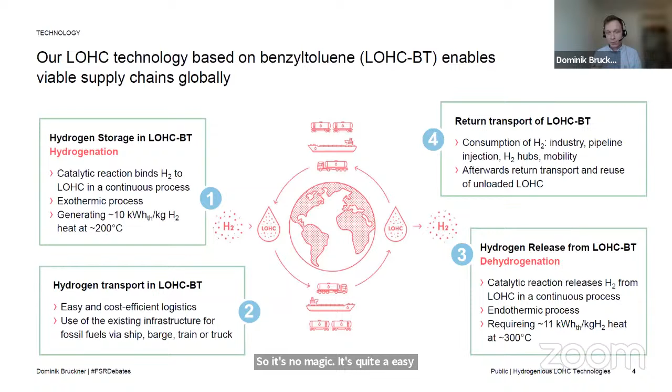And what is important here to notice are the following things. So why do I think it's a really nice technology? It's depicted here in the slide. So let's start on the left. What is really important to us is that our solution, LOHC, is quite safe. So you can handle it, differently to molecular hydrogen, really easily.

It's hardly flammable. So at 130 degrees, it starts to burn, but before that, it's hard to make it flammable. It's also non-explosive. And the hazard potential is comparable to diesel. Most people are aware of how to handle diesel. Therefore, we think it's safe, also far more safe compared to ammonia, for example.

Then in the middle here, the next point which I want to make is that you can use the existing infrastructure because it's a liquid fuel and it's comparable to diesel. Therefore, you can use existing vessels, and I will come to that also in more detail later on. So you can use existing infrastructure because LOHC can be handled at ambient temperature and ambient pressure. So it's really easy to transport and store.

And most importantly, if you compare it to liquid hydrogen, for example, you don't have a self-discharge, you don't have a boil-off, so nothing is lost during the transportation, for example, from the MENA region to Europe. So in general, we think that we have a high efficiency with the LOHC technology. The important parameter is that you can store 54 kilograms of hydrogen in 1 cubic meter of LOHC. And the carrier material benzyltoluene is already available.

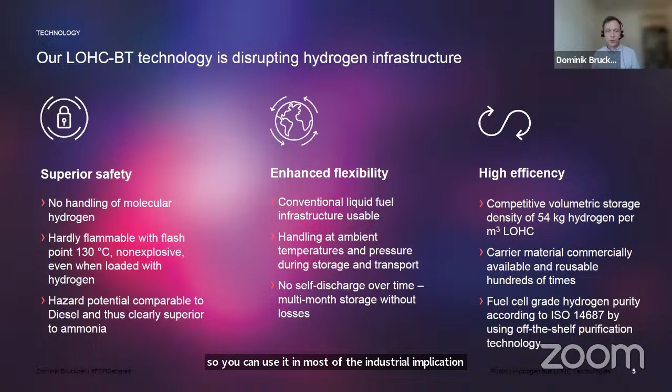And lastly, if you talk about the purity of the hydrogen at the end of the supply chain, then the purity of this supply chain using LOHC is quite high. So you can use it in most of the industrial processes without a second purification step. So this is concerning the LOHC technology as it is.

And is this reality or is it just theory? We at Hydrogenious already think it's reality, or we don't think it, we did it. And here you see an overview of our projects from left to right. It's what we've done so far, what we are doing right now, and what we are going to do in the future. So on the top left, you see our first project.

Here we already provided LOHC to a hydrogen refilling station. And I think this has been done 1.5 years ago. So we proved that the technology is ready, it's safe, it's working. Right now, at the bottom left, this is what we are constructing. So we are scaling up the technology. We are right now building a plant where we aim to transport 1,800 tons per year of hydrogen from Germany to other places, or within Germany. And lastly, in the near future, 2027 and 2030, we plan to transport more and more amounts of hydrogen.

So we plan with an IPCEI project to transport 8,000 tons per year, for example, from Sweden to Germany. And later on, looking at 2030, we are going to really scale up the technology. We're aiming to transport over 1 million tons per year, for example, from the MENA region to the port of Amsterdam, where we already have an ongoing project.

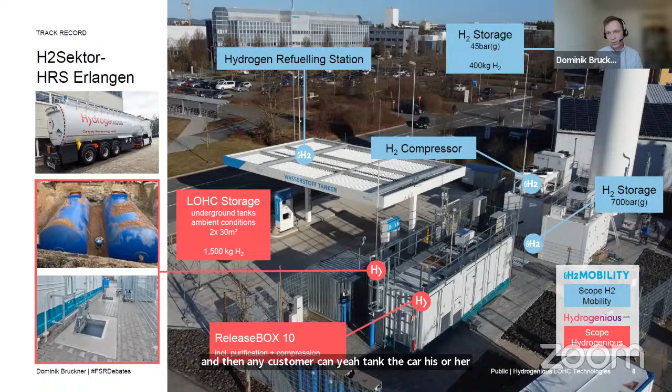And as I said, this is already working. We are producing hydrogen at our office via solar panels, and then we are loading the LOHC, transporting the LOHC to this hydrogen refilling station, and then any customer can tank his or her hydrogen car with the hydrogen we loaded in the LOHC.

And as I said already, this is only on a small scale. Of course, we have to scale it up. Right now we are in the construction of the first industrial scale setup, with a capacity of 5 tons per day of hydrogen. Looking to the future, in 2027 we are going to hopefully finish the project of building a plant with 24 tons per day of hydrogen. And then prospectively in 2030, we'll look at bigger and bigger projects.

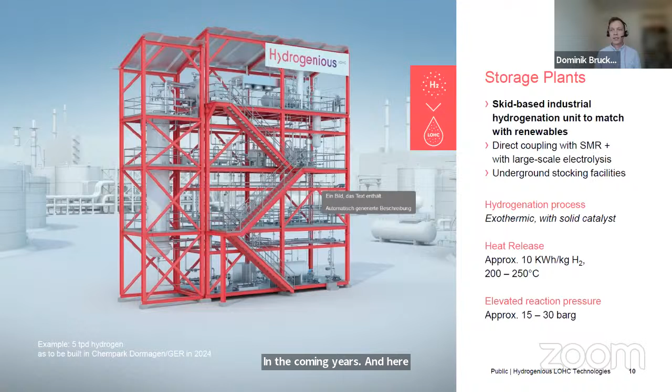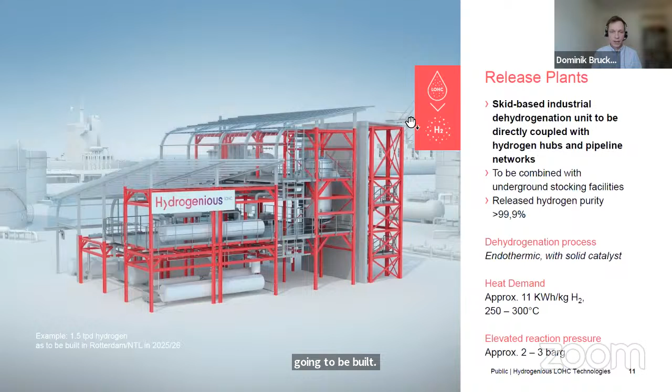Just to give you another glimpse of how the technology looks, this is an example of a storage plant which is going to be built in Germany in the coming years. Here the LOHC is loaded with hydrogen. This is called the storage plant. Similarly, this is the other side where you unload the hydrogen. This is the release plant, which is also going to be built. The construction is already going on.

Okay, of course, everyone here knows that there's not only LOHC, there are also all sorts of other possible carriers. And to be open, we need all those other forms of transporting hydrogen. However, we think that LOHC is a competitive, nice and safe option to transport hydrogen. So here are some studies I wanted to highlight on why we, and also other scientific and industrial partners, believe that LOHC is a nice way to carry hydrogen.

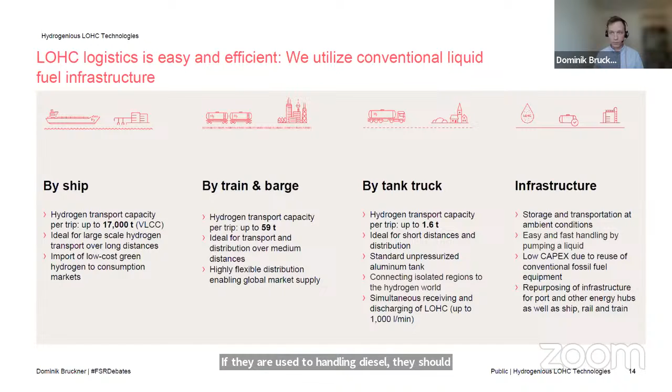So here, one advantage is that we don't need so much investment in order to start the hydrogen transport, and, which I will come to in a second, most of the regulation is in place. And lastly, maybe the most important part is that people are already aware how to handle oil. And therefore, it's quite safe, in our opinion. If they are used to handling diesel, there should be no problems in handling LOHC.

So to make it more concrete, when we talk about existing infrastructure, we can look at ships. And here it's quite simple to look at the existing ships which are available. And we can compare, okay, we have 3 possible carriers. You can transport hydrogen via LOHC, via ammonia, or you can use liquefied hydrogen. So let's start at the bottom. If you want to transport liquefied hydrogen, here you have a big problem because we only have 1 vessel in place. And so it becomes really hard to transport, let's say, 1 million tons of hydrogen because you only have 1 vessel in the world. So this is not the best option.

Okay, then we can look to ammonia. Here there are already existing vessels, but you have to be aware first that those existing vessels are mostly in use for transporting ammonia as a fertilizer. And secondly, there are not nearly a sufficient number of ships to transport the amount of hydrogen which is going to be transported in 2030. So again, it's really hard to imagine that such amounts of hydrogen are going to be transported via LPG vessels. And if you look also at the IEA reports, they state that it's really going to take a lot of time to build such LPG vessels where you can transport ammonia.

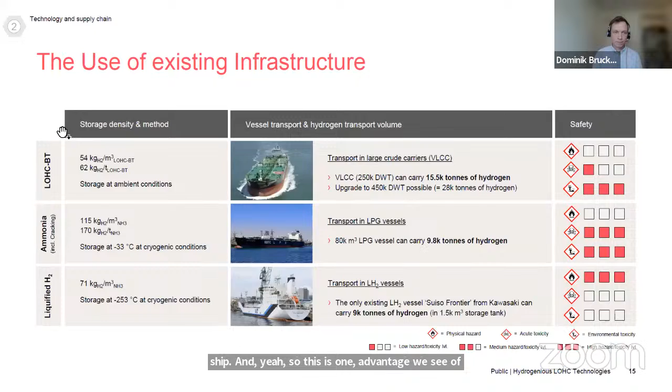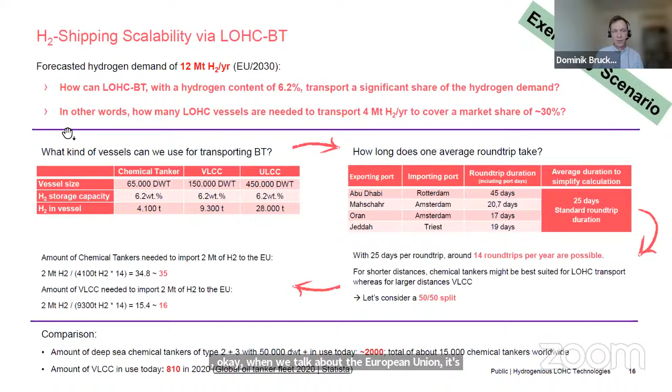Because of time reasons, I will not discuss this. You can make an exemplary scenario where you can show, okay, when we talk about the European Union, it's quite easy to use the existing infrastructure. But for now, I won't mention this. Of course, there are also other issues.

And here I wanted to highlight that there are other challenges which are not only important to us as an LOHC company, but which are also important for other carriers, such as ammonia or liquefied hydrogen. So first off, as the transport sector, we have to look at the regulation concerning RFNBO. And as of now, we see a lot of interpretational playground, so to say. So here, all carriers, as of now, have to make certain that the hydrogen we transport still qualifies as RFNBO.

Similar is the issue if you look at CBAM. So if you want to import hydrogen, for example, to the EU, then we have to make sure that our supply chains are adhering to the principles and the laws implemented by the European Commission.

And lastly, the last points I just wanted to mention are that for us, it's important to look at the regulation concerning inland transport. So here, again, we see an advantage for LOHC because it's easy to handle. And you also need to look at how the purity of hydrogen is defined when it's delivered. So these are also two open questions which all carriers, also LOHC and so on, have to look into.

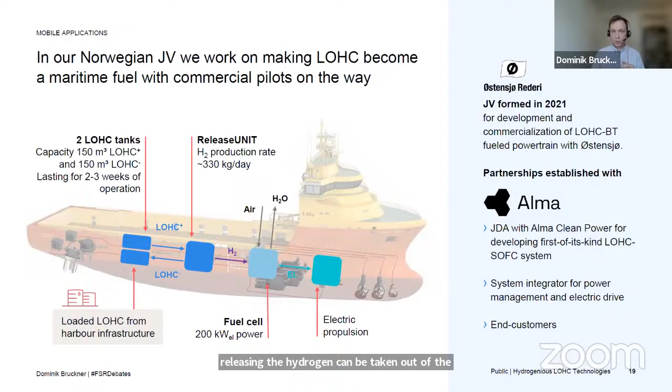The biggest advantage here is that you have a far more efficient process, because the energy for releasing the hydrogen can be taken out of the heat from the fuel cell. So these are my last words here. This is already one ship. This is ready to be repurposed with LOHC technology, and this should be online in 2026, where we aim to also decarbonize the maritime sector. I hope that I gave you a short glimpse of the LOHC technology, and if you have any questions, feel free to ask them now.

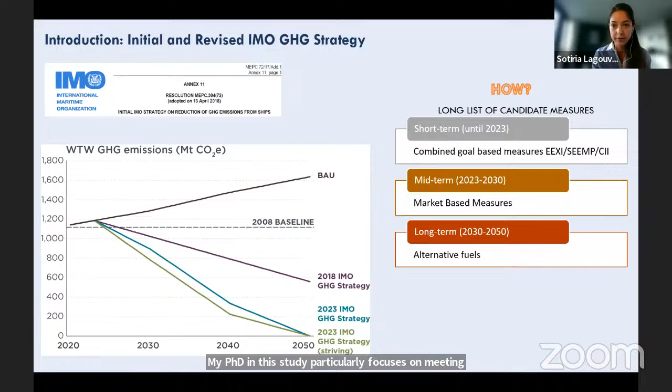And how will this be done? The strategy proposes several candidate measures divided into short, mid, and long-term measures with different implementation periods. My PhD and this study particularly focus on mid and long-term measures, mainly market-based measures and alternative marine fuels. What are market-based measures? They are environmental policies that use market prices and economic variables to enforce the polluter pays principle, and therefore they provide monetary incentives to stakeholders to reduce their carbon footprint. Examples are carbon pricing mechanisms, emissions trading systems, and other offsetting schemes.

And they have several attributes. So they are flexible and cost-effective. They let the stakeholders decide what is the most cost-effective mitigation measure to apply to their business to comply with the rule. And also they can upgrade the level playing field of green ships that already embrace the shift towards low and zero emission systems. Market-based measures can also have both short and long-term implications. A response to those measures can range from logistic-based advances to technical adjustments for reducing greenhouse gases. And they can also render low and zero carbon fuels and their supporting technologies cost competitive.

When it comes to MBMs, what is also very important is that they gather a lot of revenues, and revenues from MBMs can fund low and zero carbon investment projects for accelerating shipping's decarbonization, and also they can correct market failures, because there is a significant concern that market-based measures will have detrimental effects, particularly to lower income economies, small island developing states and least developed countries that are highly dependent on maritime trade.

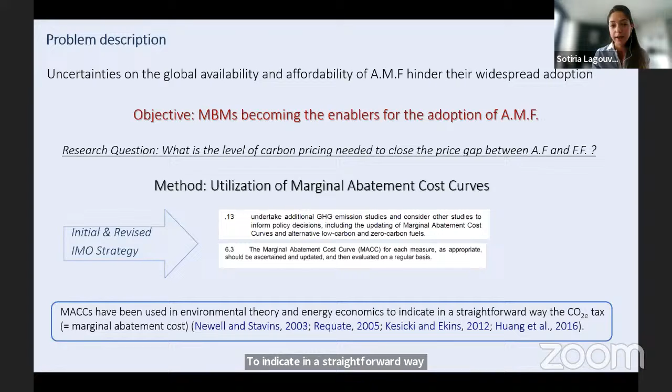We utilize the method of marginal abatement cost curves, which has been widely mentioned also in the initial and revised IMO strategy as a method to evaluate and validate different carbon mitigation technologies. And in general, MACCs have been widely used in environmental theory and energy economics to indicate in a straightforward way the level of the CO2 equivalent tax, which equals the marginal abatement cost.

A little bit on the methodology: MAC basically is the ratio of the net cost to implement any measure to the amount of CO2 it can avert. And if A is the alternative fuel that we want to focus on, then ΔN cost to A is the net cost differential to implement A in comparison with conventional fuel. And then ΔCO2 equivalent is the tons of CO2 that this fuel can avert on a well-to-wake basis of emissions. The inputs of our study: first of all, we had to identify which alternative marine fuels we would like to focus on. What is the capital cost?

Here the capital cost associates with the cost that needs to be burdened by the ship owner to implement the fuel on board the ship, and it includes the cost of internal combustion engine, the specialized fuel tanks to support these fuels, as well as the alternative fuel supply system cost.

Fuel prices: primarily we focused on production costs for these fuels. Opportunity costs: the opportunity cost calculations associate with the revenues lost due to these fuels having lower energy density in comparison to conventional fuels, and therefore the cargo space that needs to be sacrificed on board to accommodate for additional alternative fuel storage capacity.

And finally, the well-to-wake emissions factors, which account for the well-to-tank and tank-to-wake emissions on a CO2 equivalent basis, which means upstream and downstream emissions from the production and combustion of the fuels on board. The fuels that we focused on include conventional fuels and their bio and E derivatives, as well as blue and green fuels.

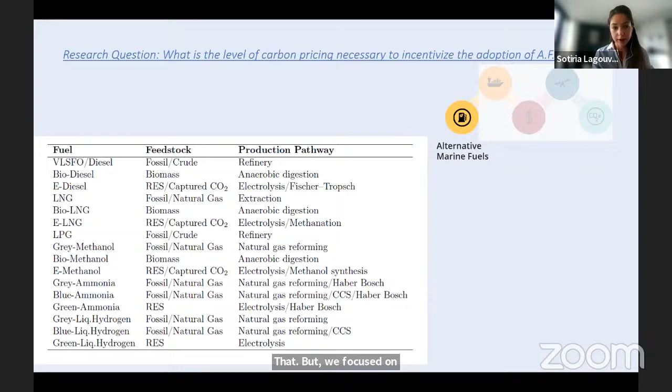The very low sulfur fuel oil and diesel, which is currently the conventional fuel used primarily on board the ship, has been the base of our study as the conventional fuel. We also applied this study for an LNG carrier that burns LNG, but primarily we focused on the bio and E derivatives, green liquid hydrogen, and green, blue and gray ammonia as well.

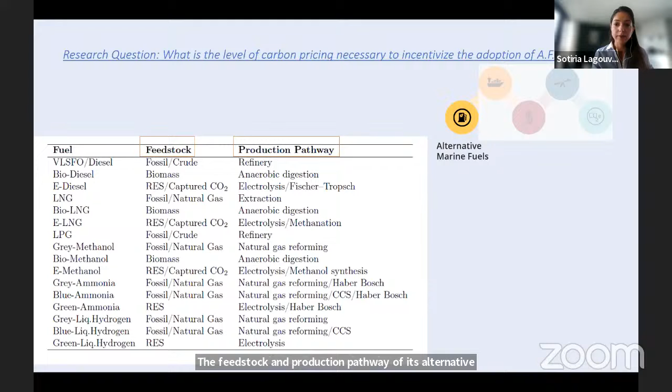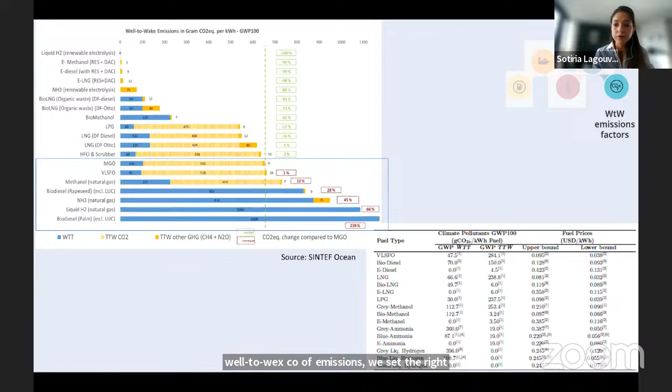And despite that these fuels have near zero tank-to-wake emissions, operational emissions, they actually have significant upstream emissions, which need to be accounted for. At the IMO right now, it is only the tank-to-wake emissions that are regulated. But it is important to highlight that by accounting for a well-to-wake scope of emissions, we set the right incentives towards scaling up sustainable production pathways for these fuels and therefore serve the sector's decarbonization targets.

We did a comprehensive review of studies that estimate production costs for these fuels. The fuel prices were always normalized by unit energy per kilowatt hour to allow for direct comparisons between the alternative fuels on a common denominator basis. This common denominator was the average power requirements of the ship on an annual basis. And we reviewed both academic and gray literature to attain our values, also accounting for the specific production pathway that each fuel has come from.

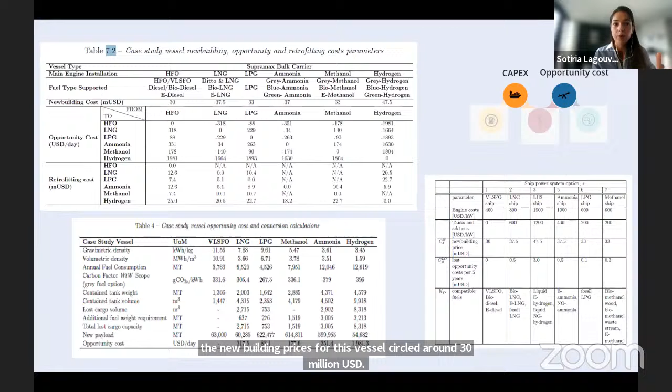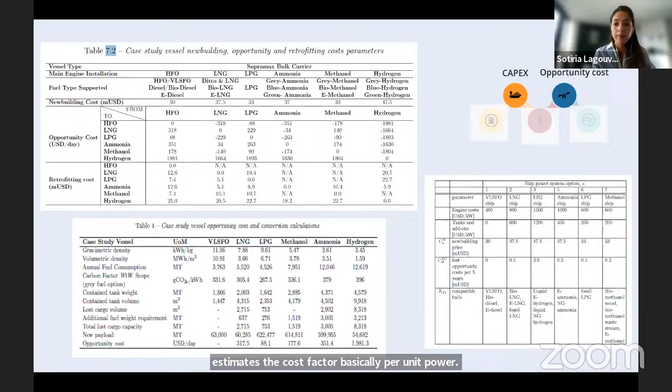Coming to costs related to capital, operational and opportunity cost. This analysis included a case study vessel, and our case study configuration burns very low sulfur fuel oil. We saw that over the past years, the newbuilding prices for this vessel circled around 30 million USD, and we used a system-based approach that estimates the cost factors per unit power as proposed by several studies in the research area, but also calculated the specific inputs for our particular vessel, a 7.5 megawatt installed power vessel.

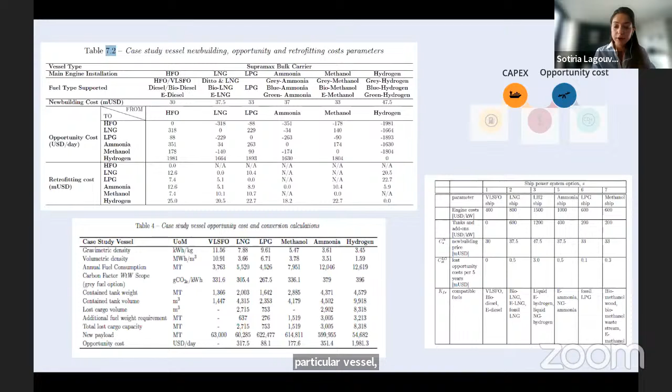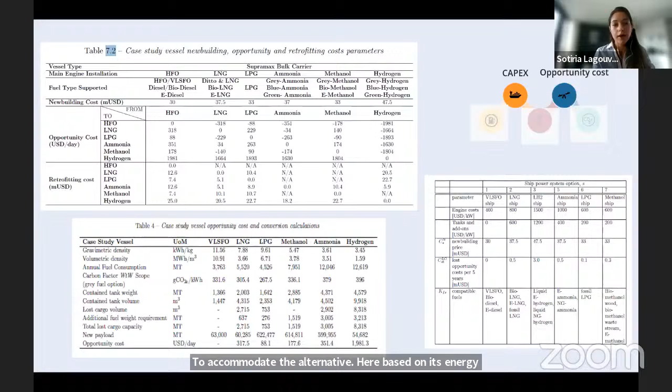And for the opportunity cost, as I briefly explained before, we account for the additional capacity that is needed on board the ship to accommodate the alternative fuel based on its energy density. And this storage capacity comes with less revenues for the ship operator, and therefore needs to be accounted for in the model.

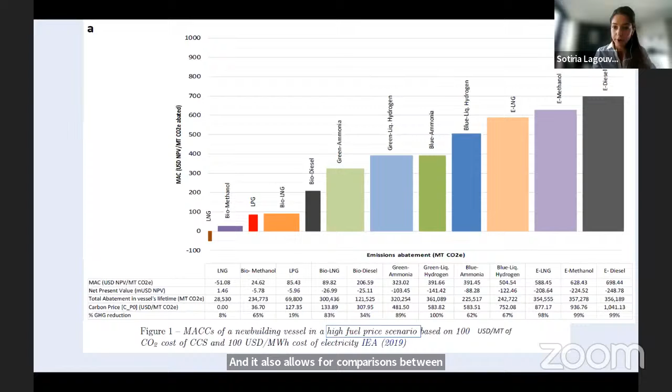Here are some representative results. As established already, the marginal abatement cost is a straightforward interpretation of the relationship between cost effectiveness and carbon abatement potential, and it also allows for comparisons between the different alternative fuels. The figure illustrates the estimated MAC, or the net present value per metric ton of CO2 equivalent abated, on the y-axis, and on the x-axis, the width of each column shows the abatement potential relative to the very low sulfur fuel oil, in this case the baseline fuel.

We accounted for a low and high bound of fuel prices to capture the uncertainty of the expectations for alternative marine fuel prices, because they were varying a lot in our initial analysis, and the dependency also on exogenous inputs, such as prices of renewable electricity, carbon capture and storage, and also hydrogen carriers, as we mentioned already.

This figure, for example, shows the MAC for a new building vessel in a high fuel price scenario for $100 per ton of CO2 cost of carbon capture and storage and $100 per megawatt hour cost of electricity. A little bit on the data tables: they show the MAC values, the total amount of CO2 averted by implementing the alternative fuel over the vessel's lifetime, the estimated level of carbon pricing that needs to close the price gap, and the percentage of greenhouse gas reductions achieved relative to using the baseline fuel.

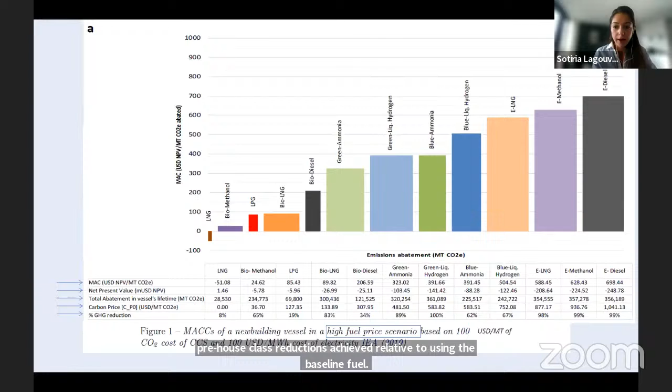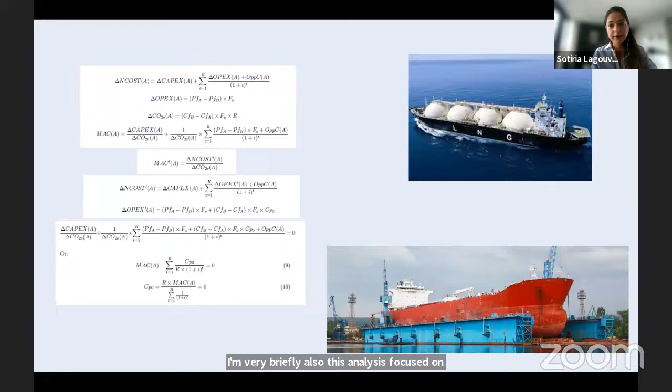Some of the conclusions of the study: the most significant parameter affecting the MAC of alternative marine fuels is the production cost, which further relates to the vessel's future operating costs. Biofuels demonstrate high technical potential for shipping when we compare their future cost projections, but large-scale supply of biomass is likely to be constrained, firstly due to competition with other sectors, but also other sustainability challenges. The level of carbon pricing should consider the average age of the fleet at the time of enforcement, and higher carbon levies are required to incentivize retrofits to older vessels.

Incentivizing the adoption of green liquid hydrogen in a high fuel price scenario would require a carbon price as high as $700 per metric ton of CO2 equivalent. That needs to be multiplied by 3 to account for the fuel price per ton of fuel. And with levelized cost of electricity as low as $20 per megawatt hour, 150 would be sufficient. Finally, carbon pricing aims to shift the sector's demand towards alternative fuels, encourage investments into zero carbon systems, close the price gap with conventional fuels, and scale up the production of green hydrogen and hydrogen-based fuels.